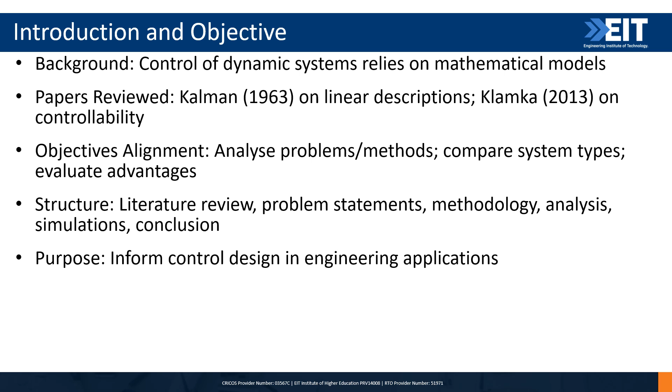Early literature centers on linear systems with state space methods. Kalman contributes axiomatic modeling using differential equations and ranks for controllability. Klamka surveys criteria for various systems, including linear, nonlinear, and stochastic.

Comparison: Kalman for deterministic linear, Klamka extends to non-deterministic and probabilistic. The advantages are Kalman's simplified computation, Klamka's versatility for uncertainty. Next will be the problem statements.

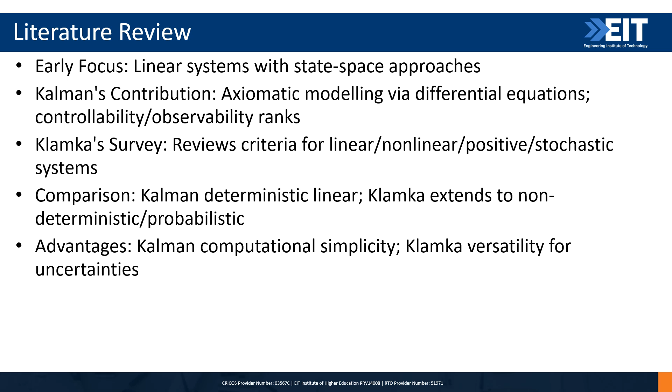Kalman's problem involves representing linear systems in state space and achieving minimal realizations from input-output data. Klamka's addresses controllability for steering states across classes. Covers deterministic for both. Non-deterministic, like delay, for Klamka. Probabilistic, stochastic, for Klamka.

Comparison: Kalman's decompositions versus Klamka's theorems. The advantages are Kalman focuses on precise tasks, Klamka focuses on robust scenarios. Let's move to methodology.

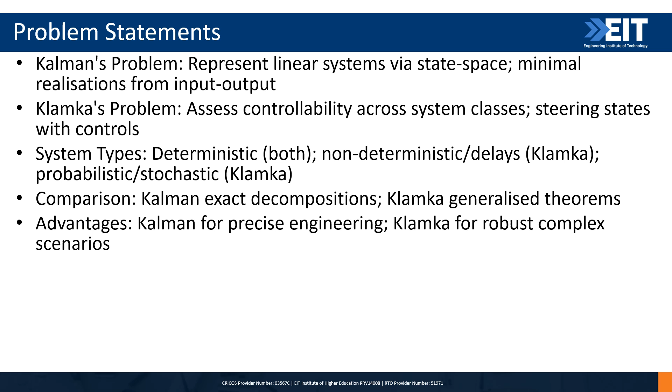I describe the process: extract problems and methods, categorized by type. Kalman's uses state space equations and rank checks. Klamka's includes algebraic criteria, theorems, stochastic measures. Comparison across deterministic, ranks; non-deterministic, approximations; probabilistic, expectation.

Simulations use Python on a second-order system with noise for probabilistic. Advantages are Kalman's method is efficient in linear, Klamka's methods are general. Now, let's move to the detailed analysis for Kalman's method.

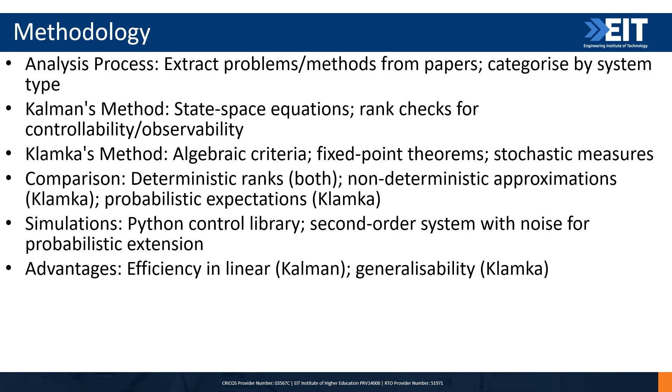Kalman's problem reconciles state variables and transfer functions for minimal realizations. The equation is listed in this slide. It applies to deterministic linear with constant parameters. The limitations are no non-deterministic or probabilistic extensions. However, the advantages are it minimizes the model for filter design and simulations. Let's move to Klamka's analysis.

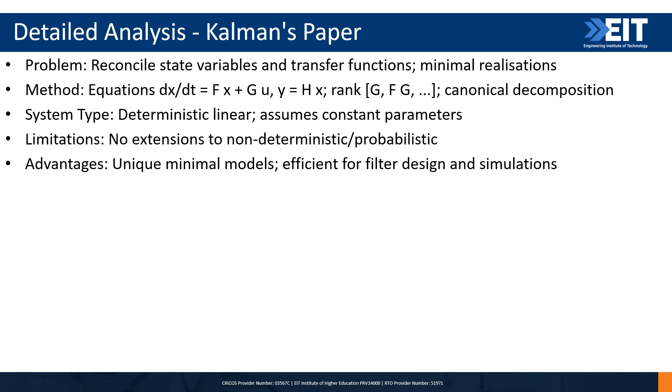Klamka's problem: controllability conditions for state steering. The methods are ranks for linear, theorems for nonlinear and delayed, expectation for stochastic. It covers deterministic, exact; non-deterministic, approximate; probabilistic, mean square.

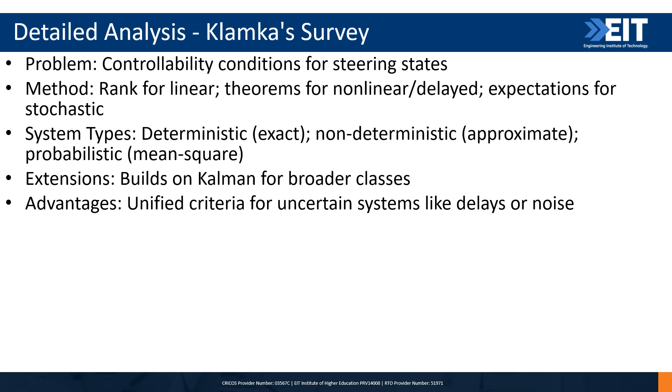It's built on Kalman for broader classes. The advantages are criteria for uncertain systems like delays or noise. The next slide will describe the method comparison.

Kalman's scope focuses on deterministic linear realization. Klamka's focuses on broad verification. Both of them have ranks and decomposition on deterministic. However, for non-deterministic, only Klamka's approximation or delays are the focus. On the probabilistic side, also only Klamka's measures.

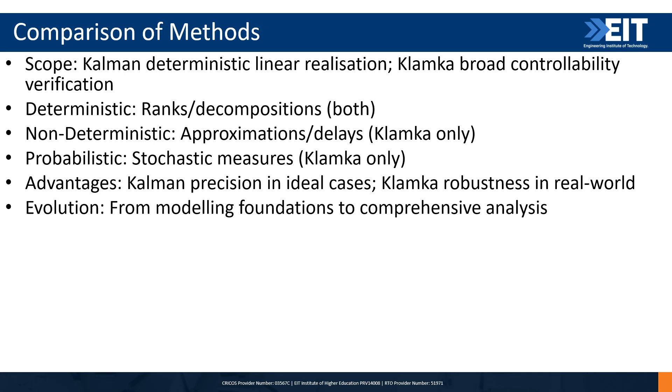Kalman's deterministic: rank 2, controllable. Klamka's probabilistic: 100 runs with noise, the means match. The results are deterministic is predictable. Probabilistic is robust with deviations. The discussion is Kalman's method is for the ideal case, Klamka's method is for uncertainties.